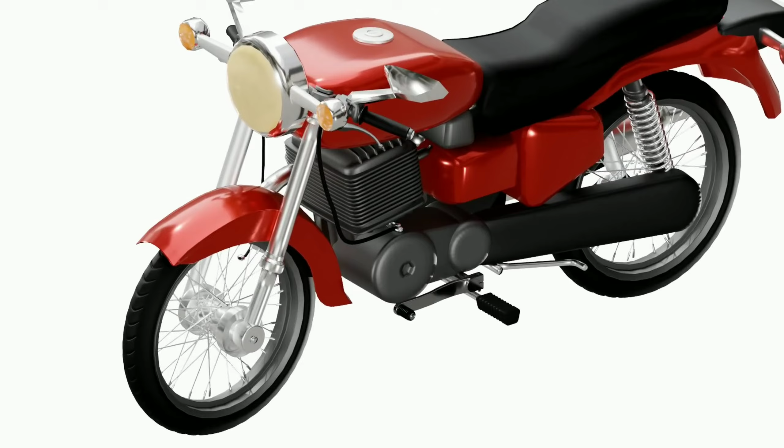In motorcycles, the torque and RPM of a wheel is controlled by manually shifting gear levers up or down with our left foot. A motorcycle gearbox comprises a series of different gear steps, which can be switched according to the requirement. The gear lever is connected to a shifter shaft, and the other end of the shifter shaft is connected to a ratchet mechanism. This ratchet mechanism activates as shown in the animation.

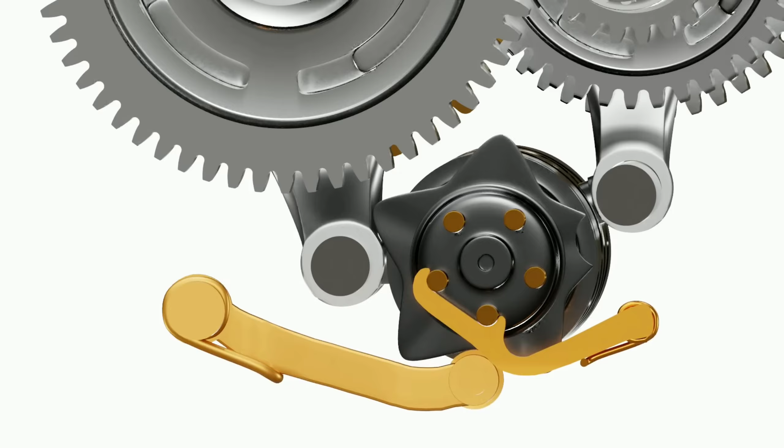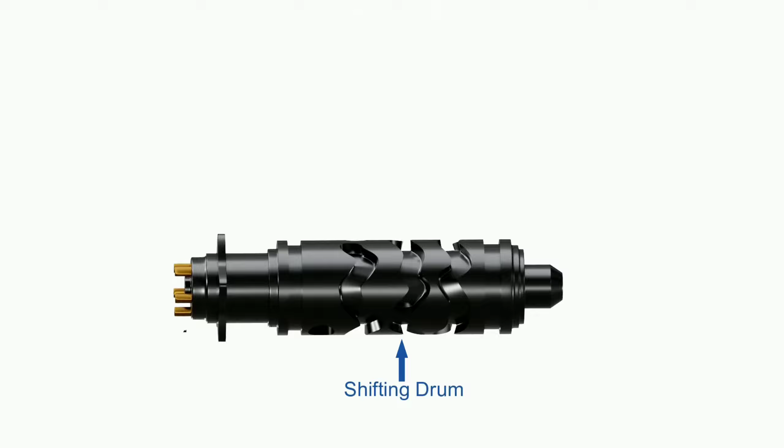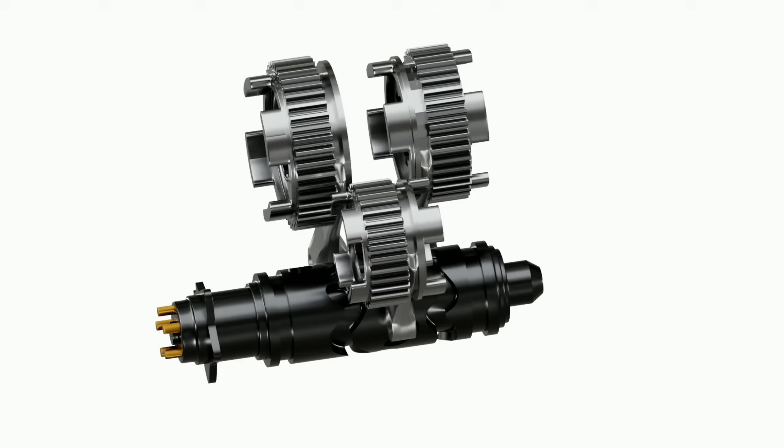The purpose of this ratchet mechanism is to rotate the shifting drum at specific angles. The shifting drum has special shaped channels cut into it. Special attachments known as shifting forks fit into these channels. Gears known as gear dogs or dog clutches fit into these shifting forks. As the shifting drum rotates, the shifting fork, along with gear dogs, slides sideways as shown in the animation. The purpose of sliding dog clutches will be explained shortly.

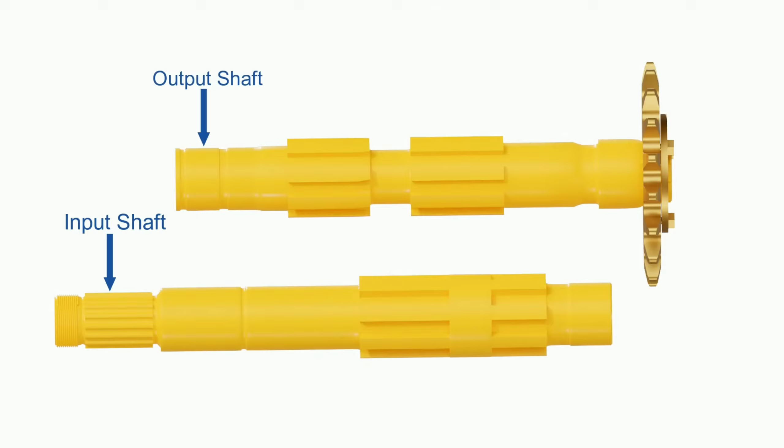First, let's understand the arrangement of different gears in the gearbox. There's an input shaft and an output shaft. The gears are arranged with their axes aligned to their respective shafts. Some gears are internally splined. These splines perfectly mesh with external splines of their respective shafts, allowing gears to slide from side to side while maintaining the same angular speed as the shaft. All gears shown here in red color are splined.

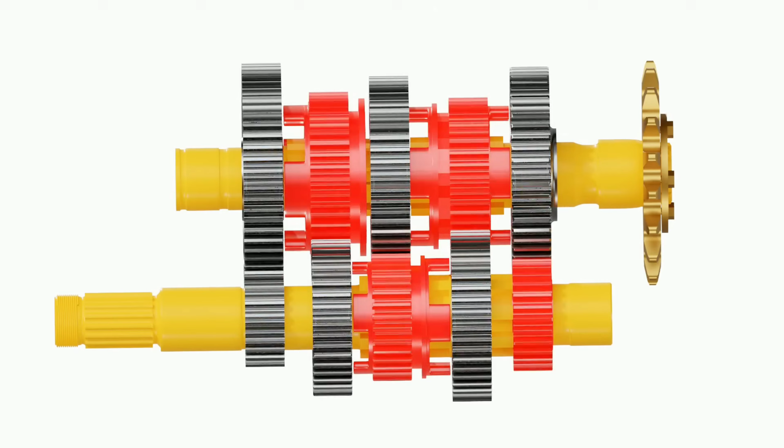Some gears are freewheeling gears. These gears can freely spin about their axes but cannot slide sideways along the shaft. Gears shown in blue color are freewheeling gears. The remaining gear is a static gear, which is attached to the input shaft. Let's number all these gears from 1 to 5 for better visualization.

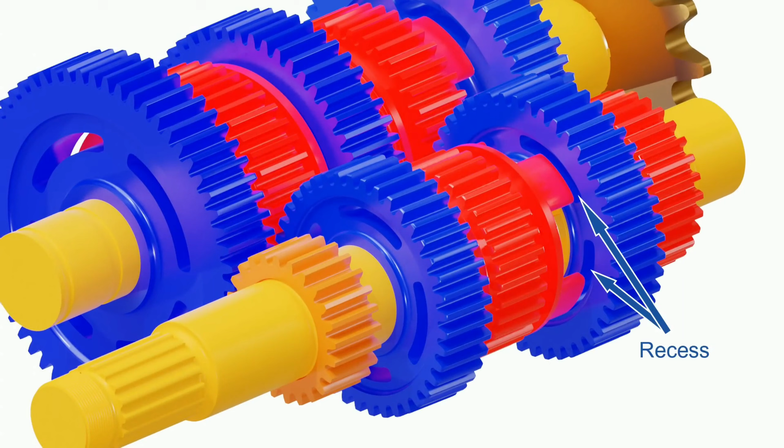Please note that all freewheeling gears adjacent to dog clutches have recesses. The dog teeth can slide into these recesses and lock these two gears with each other. Now let's see how power is transferred with different gear ratios in a gearbox. One thing you can observe is that every splined gear is meshed with a freewheeling gear. In this condition, if we spin the input shaft, no power is transferred to the output shaft. This is the neutral position of the motorcycle.

To change into first gear, the gear dog number 5 on the output side slides toward the freewheeling gear number 1 and locks with it. Since gear number 5 is splined, the output shaft will now spin with this gear. This is the first gear.

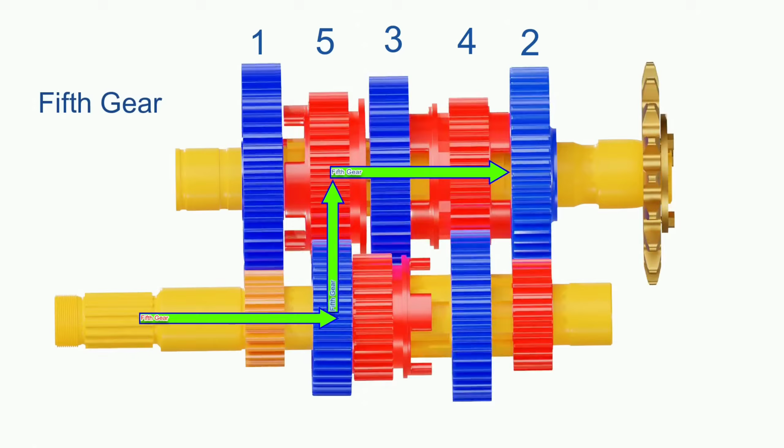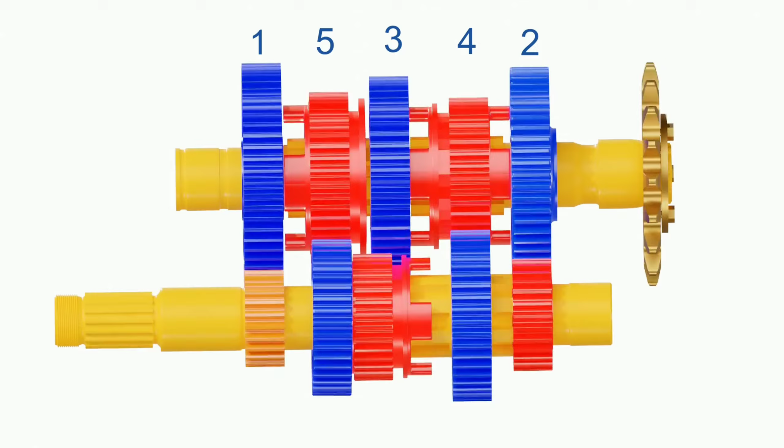When we change to second gear, the gear dog number 5 on the output shaft returns to neutral position, and gear dog number 4 slides toward gear number 2 and locks with it. The technique is similar when we shift to third gear, the fourth gear, and the fifth gear. Please note that before shifting from one gear to another, the previously locked gear dog returns to neutral position first. Only then does it slide into another recess to achieve power transmission. This is why there is a neutral position in between every successive gear.

But in real life, we find the neutral position only in between first and second gears. To understand how this happens, let's go back to our ratchet mechanism. A star shift detent mechanism is responsible for proper shifting of gears.

As we can see, the star plate has ridges and valleys. A spring-biased roller rolls onto these ridges and valleys. The position of the roller at each ridge of the star corresponds to neutral condition. As we can visualize, the roller cannot rest on the ridges of the star and immediately disposes to the appropriate valley, preventing the shifting drum from stopping at neutral position.

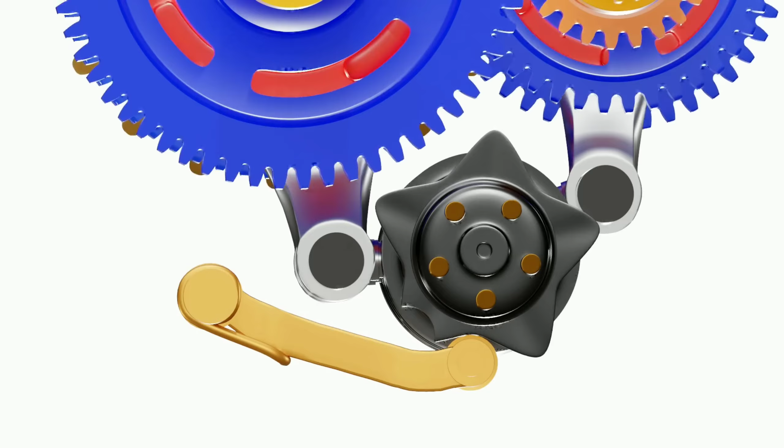But one of the ridges of this plate is ground off, as we can see here. This is done in between first and second gears so that the roller can briefly rest on this ground-off surface, thus enabling the shifter drum to stop at neutral position instead of shifting directly to second gear.

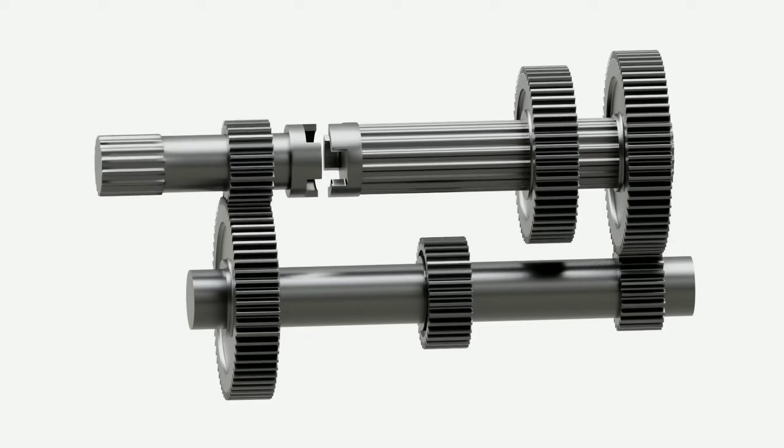The transmission system shown here is known as a constant mesh transmission system because all gears remain engaged with each corresponding gear mate at all times. In conventional sliding mesh transmission, gear shifting is done by completely disengaging a gear and re-engaging it with another. It involves complex mechanisms, and drivers need tremendous skill to operate them. In addition, imperfect meshing causes gear teeth to grind and wear.

The constant mesh transmission completely eliminates this problem, as you might have noticed that some gears are only partially engaged sometimes. But this is not a problem because they are not transmitting power at this moment. Only those gears which are transmitting power need to be fully engaged at that instant.